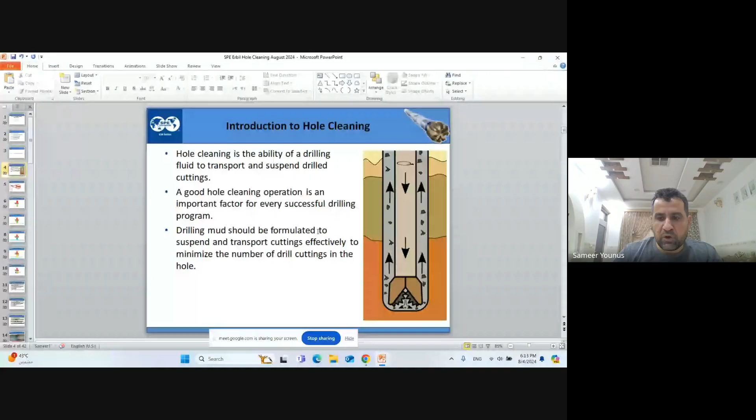Sorry for interrupting you, please share the entire screen. I am already sharing the entire screen. Once I said that, you told me you can't see the whole screen, but this is the entire screen. When I was moving the slides you were not following me. Do you see my slide? Yes, it's from the introduction.

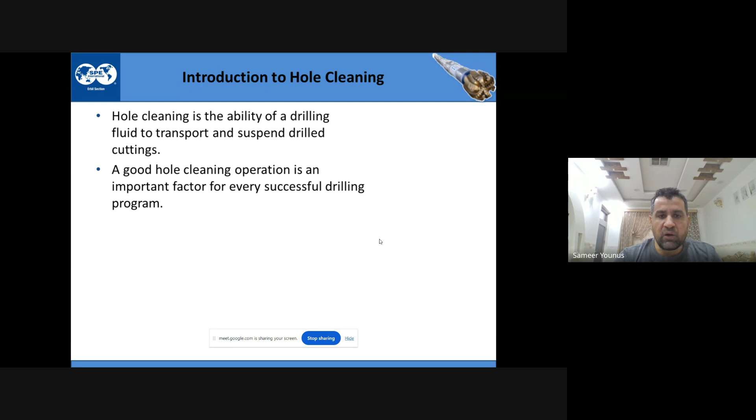So as we said, one of the major functions of drilling fluid is to clean the hole from the cuttings which we generate while drilling. Without cleaning the hole, we cannot go ahead and drill because the string gets stuck. A good hole cleaning operation is an important factor for the success of every drilling program, and drilling mud should be formulated in a way that it suspends and transports cuttings to the surface effectively and makes the hole clean.

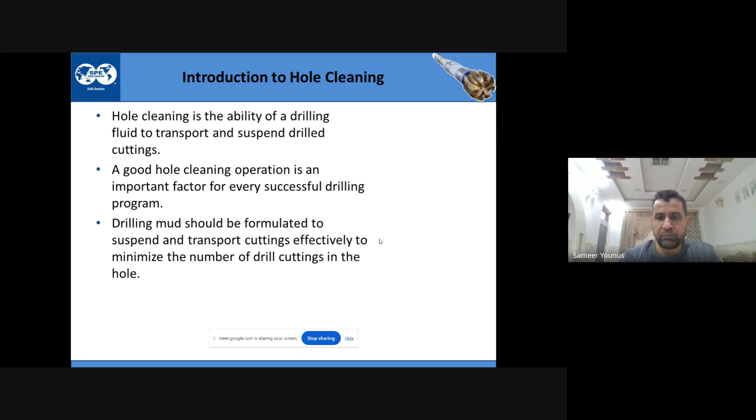So this is the principle. Let's go to one of the wells, our hole. When we drill vertically, there are forces acting downward and forces acting upward. To clean the hole, I will explain one by one how we overcome the forces acting downward.

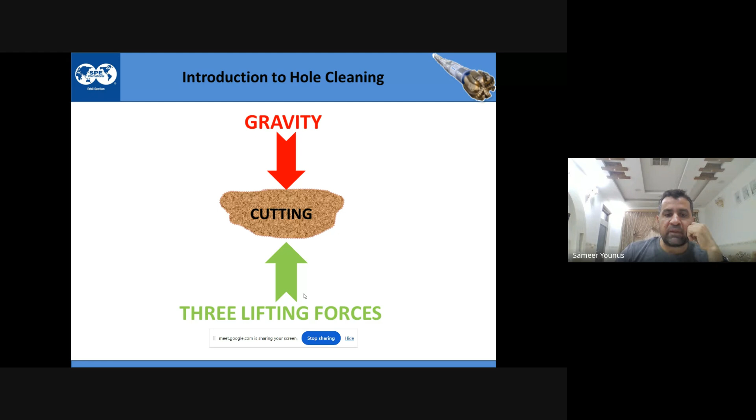First, the lifting force works against the gravity of the cuttings. The cuttings tend to go down, but we need to lift them. What forces help us lift these cuttings to the surface, to the shale shaker, clean the mud, and pump it again into the well? I'll explain one by one.

First is the buoyancy force. The drilling fluid has buoyancy. The higher the density of the drilling fluid, in specific gravity or ppg, the higher the buoyancy force. This is one of the forces that works cuttings out of the hole.

Second is the annular velocity, which works against slip velocity. The slip velocity means the cuttings tend to come down, but if the annular velocity is fast, it pushes the cuttings out of the well and does not allow them to settle while drilling. This gives a better chance for hole cleaning, so the higher the annular velocity, the better the hole cleaning.

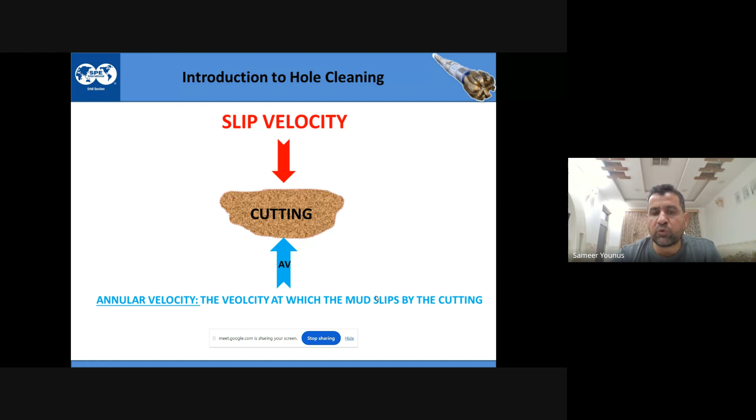But remember, very high annular velocity for hole cleaning will lead to erosion of the wellbore and washouts, and many other problems which we'll discuss later. I'm trying to keep this very basic for now.

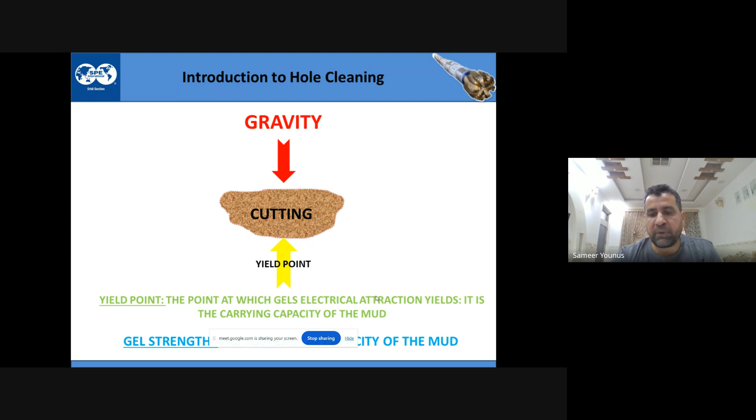Another factor is the yield point of the mud, which is the electrical force of attraction between mud particles. This is the carrying capacity of the drilling fluid. The yield point pushes the cuttings up, and gel strength also helps support this. But gravity tries to settle the cuttings.

So the lifting forces - annular velocity, buoyancy, and yield point - push the cuttings up, while gravity pushes the cuttings down. When we overcome the force of gravity and cutting slip velocity, we can clean the hole effectively. Is that clear?

Kak Herman, do you guys hear me? Yes Kak Sameer, it's clear. Thank you. Okay.

We need to monitor hole cleaning throughout the operation at all times. By observing torque and drag trend lines while drilling, we can determine if the hole is clean or not - through string movement, pickup weight, slack-off weight, and rotary weight. If we have high torque, hole cleaning is probably not good, and if the string weight shows too much drag, the hole is probably not clean. We also monitor the quantity, size, and shape of the cuttings.

The shale shaker is one of the best places to monitor if we have good hole cleaning. For example, if you're drilling at 20 meters per hour ROP, but only a small amount of cuttings comes back on the shakers, you know there is a hole cleaning problem. At that point you'll see torque and drag and pressure go up, along with many other problems. The shaker is a good place to observe this.

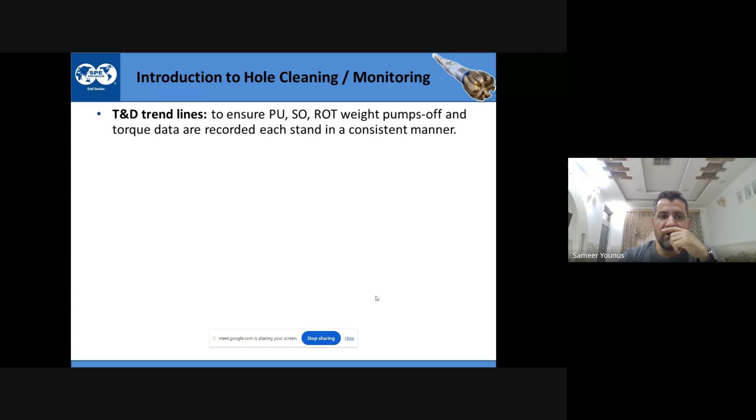In our case, it's about hole cleaning - when the ECD becomes very high, we know there's a probability the hole is not clean. In this case, we have to circulate until the hole is clean and make sure all cuttings are circulated out of the well. So we monitor torque and drag, the size and shape of cuttings, the amount of cuttings on the shakers, and downhole pressure while drilling, which also tells us the ECD.

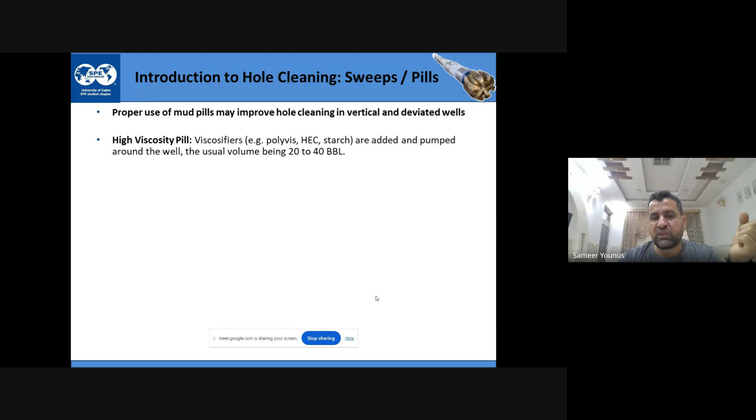If we use pills or sweeps, it improves hole cleaning. On the rig side, we use a lot of material to viscosify the drilling fluid and increase the viscosity so that we can carry the cuttings and bring them to the surface. We have high viscosity pills, low viscosity pills, weighted pills, and tandem pills.

Many times these tandem pills are used in highly deviated wells. You pump a light fluid, then low viscosity, then a high viscosity pill behind that. This will first wash the cuttings and agitate them, making the flow more turbulent, and then the high viscosity pill will pick up the cuttings and bring them to the surface. So these are the pills and sweeps we are using.

Many times while drilling a couple of stands, we pump a high vis sweep to sweep the hole and clean it. It's a very useful technique to clean the hole, especially in highly deviated wells. We use them a lot.

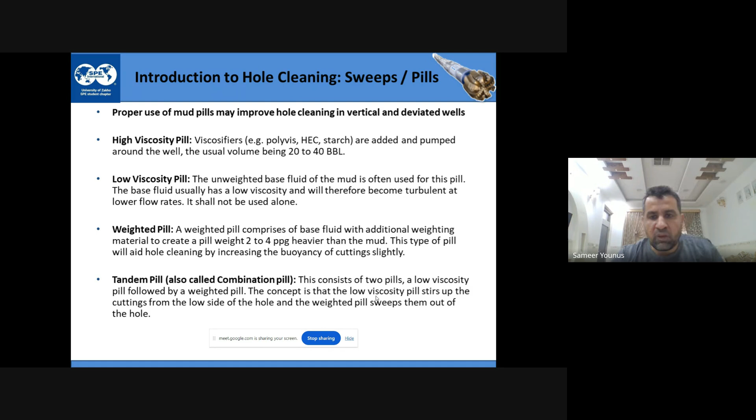There are some factors affecting hole cleaning. What are these factors, and what is their impact on drilling operations? We will go through them one by one. There are so many factors and players in hole cleaning.

Hole size: if it's a big hole size, what happens? It will result in a smaller annular velocity. This means the smaller the hole size, the higher the annular velocity, and the better the hole cleaning.

Washout happens many times in the wellbore. After you run the caliper log, you find there are some places in the wellbore where you've circulated for a long time, or it's by default a very soft formation, so it gets washed out. In these washout places, the annular velocity drops, and the carrying capacity, the hole cleaning capacity, will also drop.

Drill pipe diameter: the bigger the drill pipe, the better for hole cleaning, because it gives you higher annular velocity with smaller annular clearance. GPM, the gallons per minute: the more flow rate, the better the hole cleaning and the better the annular velocity.

Rotary speed: for a vertical hole it's not a big issue, but for deviated wells it's a big issue. Once you're drilling in rotary mode, it's already rotating by default. But sometimes in directional wells you have to do a lot of sliding, and once you do a lot of sliding, you're probably not cleaning the hole very well. So it's good to do rotary drilling and rotation sometimes, because rotation will agitate the cuttings and help push them out to the surface.

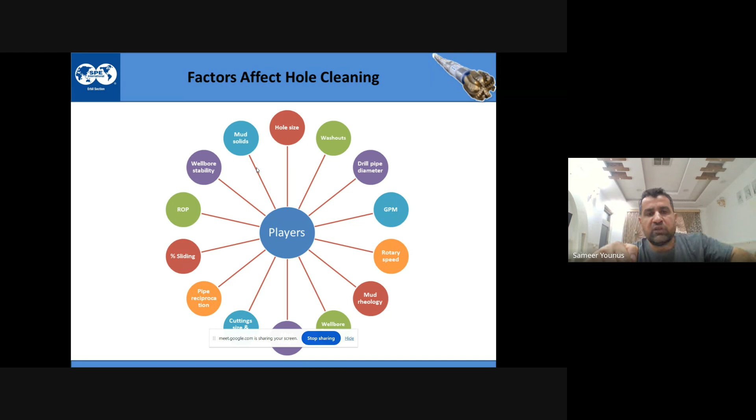But if the wellbore is washing out, it's getting bigger. When the wellbore gets bigger, your annular velocity drops. When annular velocity drops, your hole cleaning will not be very effective. Mud solids - once you are drilling, there will be a lot of mud solids in the wellbore, okay. So too much mud solids in the wellbore leads to washouts, okay.

That's why you have to run solids control equipment to remove the solids. Otherwise you will have washout. Mud solids will increase the PV, plastic viscosity - that's a good sign for hole cleaning. But very high PV means too much solids in the mud, and you will have problems again. So it's all interrelated parameters, okay.

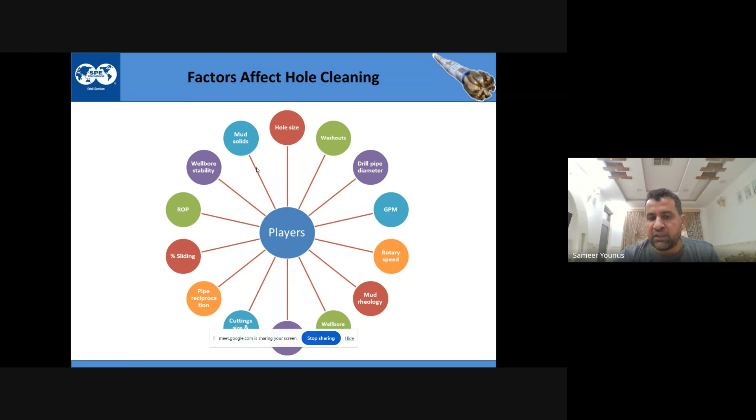What are the drilling problems related to poor hole cleaning? So once you are not cleaning the hole, obviously you will face problems. You cannot drill ahead, but before not being able to drill ahead, you face problems. What are these problems? We will go one by one.

So what are the symptoms? How do you know the hole is not clean? If you go to the shaker - you are drilling with 10 meter per hour ROP, you know how many barrels of cutting you are making. Of course the cuttings which come to the shakers should be more than what you are actually drilling, because the cuttings will swell and become bigger in size many times if you don't have good inhibition of the drilling fluid. So even if you have the same amount of cutting, you will know by default how the hole cleaning is.

That's why all the time somebody is going to stay on the shakers. A good drilling supervisor and a good drilling fluid engineer always check the shaker, how much cutting is coming out of the well. If you are drilling with high ROP and a small amount of cutting is coming, it means that you have a problem.

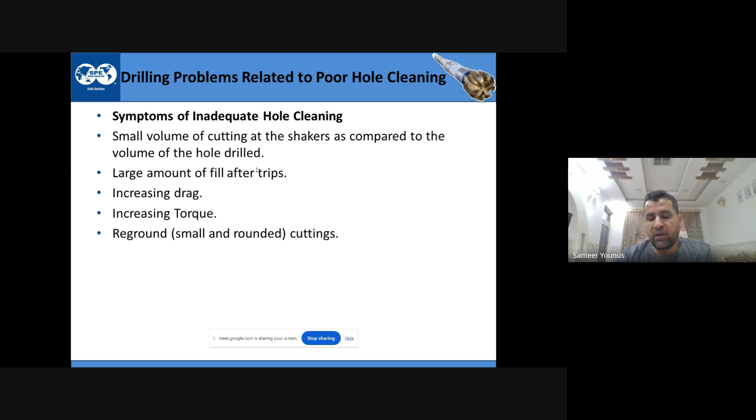Of course, we discuss drag, torque and drag, it will increase. And I said reground cuttings, because the cutting will be reworked. You are breaking the rock by the bit, you cannot clean it very well, it will remain under the bit for a long time. You will be reworking on the same cuttings for a very long time. It will damage the bit, prematurely dull the bit, and cause problems for casing setting depths. Because many times we have seen poor hole cleaning. You run the casing, and you see 3-4 meters of cuttings on the bottom.

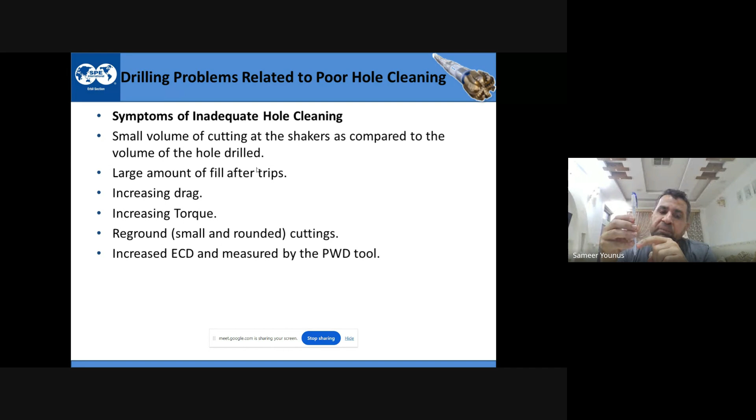That's a problem. It means your casing will never be on bottom where you planned. Poor hole cleaning can be seen by ECD, okay? If you have PWD in the BHA, pressure while drilling, it will tell you the pressure close to the bit here. What's the pressure downhole? Normally if ECD while drilling gives you 12.2, but if ECD is 13 ppg, that's high. So you need to know that the hole is not clean, okay?

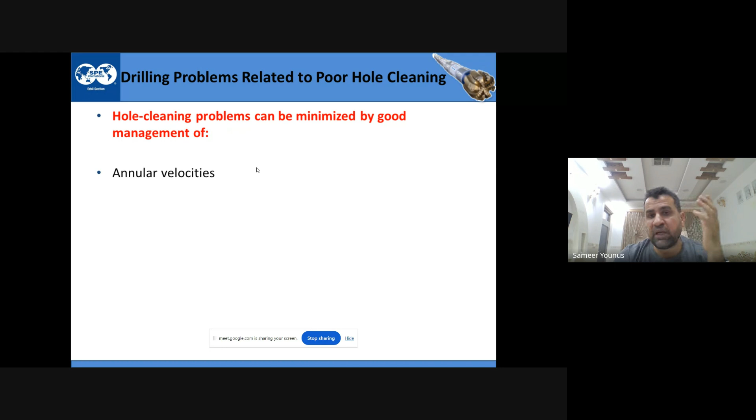The problems can be minimized by good management of annular velocity, drilling fluid viscosity, pipe rotation, and pipe eccentricity. Pipe eccentricity and pipe rotation speed mostly apply in highly deviated wells, okay? The last 2 points apply more to highly deviated wells.

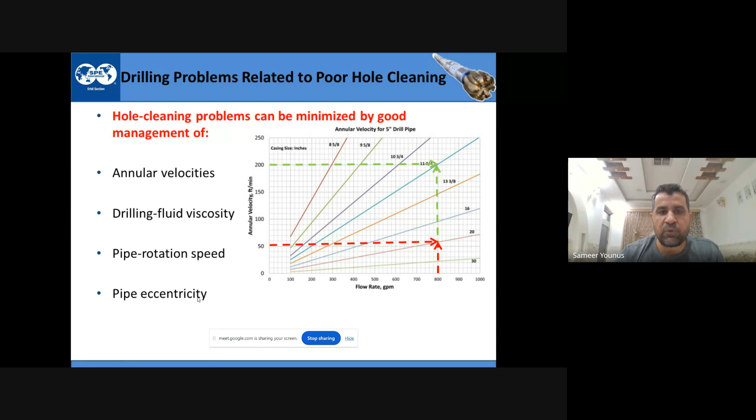So if you cannot remove the cuttings, so many problems will happen. What are these problems? Some of them we already talked about. We said you will have high torque and drag on the drill string. So if you have high torque, what does it mean? It means that you are getting close to the makeup torque of the drill pipe, let's say. So if your drill pipe torque rating is 25,000 foot-pounds, drilling torque more than that is impossible.

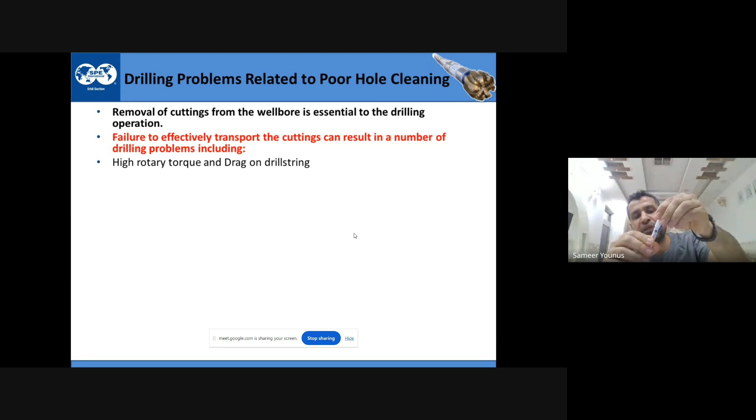So torque and drag means you get stuck, okay? Of course, that's a big problem. Hole pack off is another problem, with torque and drag increasing further.

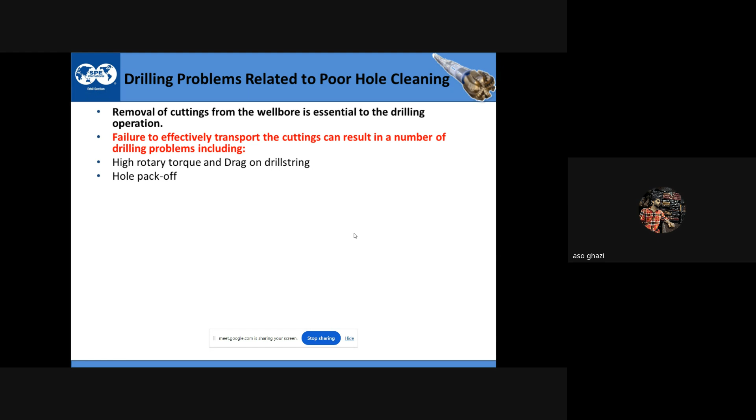With too much cuttings in the hole, you might get packed off. What's packed off? That's when the wellbore is closed around the drill string. You cannot circulate, and sometimes you cannot even rotate, but the biggest problem is circulation. Once you don't have circulation, the hole is packed off, and that's a stuck pipe issue.

Formation breakdown: if you have too much cuttings in the wellbore, the ECD might increase very high, close to the fracture gradient of the formation. When designing a well, you have fracture gradient and pore pressure lines, and you design your drilling fluid between them, higher than pore pressure, lower than fracture pressure. If ECD goes too high, you might break the formation, which is a big problem, and this means you will have losses.

In case of total losses, you will get underbalanced. Once you get into underbalance, you might get a kick, and you will get into a well control situation. So poor hole cleaning might lead you to a well control situation.

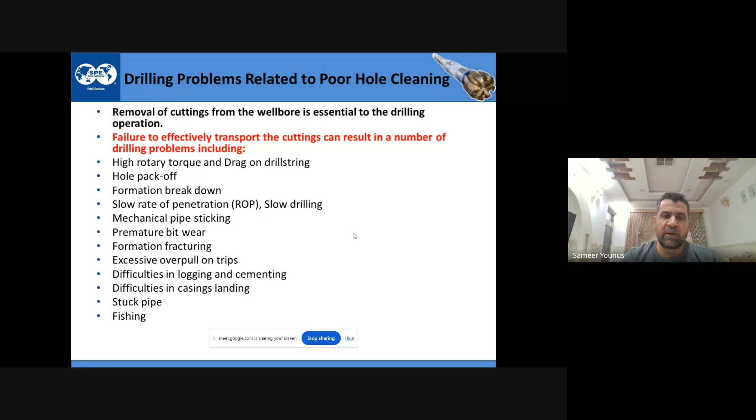Once you get to stuck pipe and fishing, this is out of scope of the drilling program, meaning you are doing NPT, non-productive time. Once NPT is too much, the upper management, the drilling manager, the drilling superintendent, everybody is unhappy, the company is unhappy. You are spending a lot of money and losing a lot of time, because stuck pipe and fishing needs a lot of money and time, and you might not even be able to fish the drill string out.

You might cut the pipe and cement the pipe in place, put another cement on top, do a sidetrack, drill another hole, and this might cost you a couple million dollars. So it's all NPT. Hole cleaning is a very, very important topic. If you are a drilling supervisor, drilling engineer, senior drilling engineer, or drilling superintendent, you have to make sure the hole is getting cleaned while drilling. Otherwise, all these problems will come one by one, and you face a lot of problems. So efficient drilling is good for drilling the well on time and on budget.

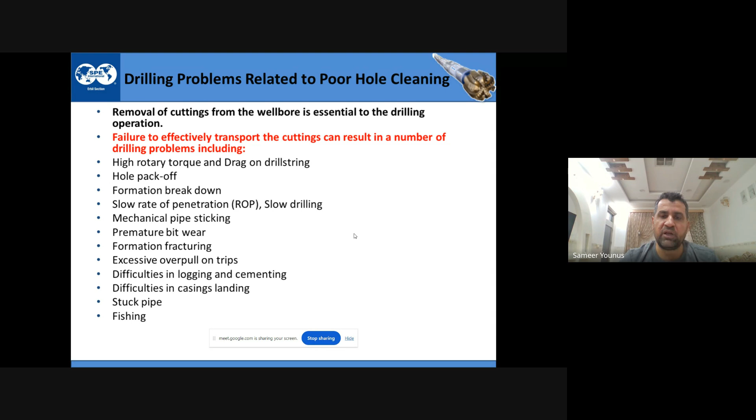Hole cleaning in the well planning stage - this is a very important point. Anything you do while well planning is better than doing it on location. For example, flow rates - you have to design flow rate and mud rheology prior to drilling the well, because that's part of well planning. But after that, on location, it's not part of well planning. Once you do adjustments there, you are wasting time and wasting money. So it's better to do everything in the planning stage, like flow rate.

For each section, what will be your flow rate? So in the well planning stage, once you design hole angle, hole size, hydraulics, bit hydraulics, mud pumps, slide drilling, BHA, casing program, planning tools - what are the planning tools? And hole cleaning charts, stuck pipe guidelines.

All deviated wells require high annular velocities. Deviated wells of course require high annular velocity because we said it's very difficult to clean the hole, and you should plan large diameter holes to be set to vertical.

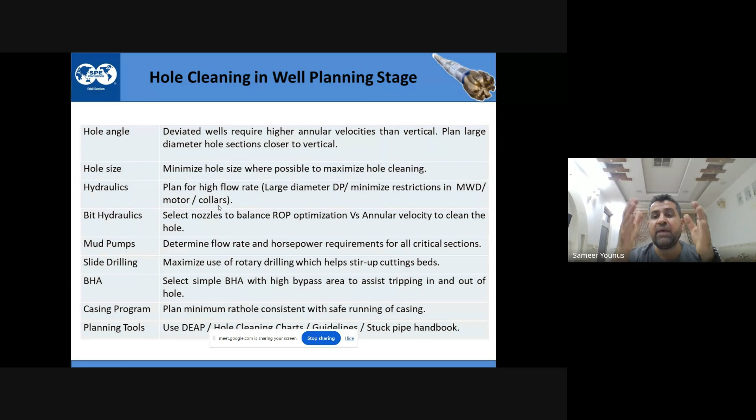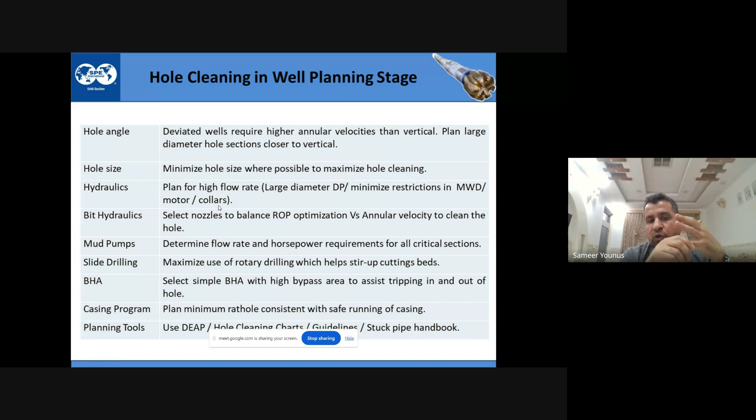Hydraulics - for flow rates, you have to design flow rates and use a large diameter drill pipe. For example, you can use 5-7/8 drill pipe, 5.5-inch drill pipe, or 5-inch drill pipe, and you have to have a good MWD with minimum restrictions in motors, and drill collars should have bigger IDs. Many times a flow kit in the MWD and motor will restrict you with the flow rate. So that's a problem. You have to plan hydraulics to give you a better flow rate for top hole and higher pressures for down holes, and hydraulics like nozzle size and number of nozzles, planning annular velocity, planning ROP, all these jet impact forces, jet nozzle velocity, and hydraulic horsepower.

There are softwares, hydraulic Excel sheets that assist in bit hydraulic design and selections, because a big part of hole cleaning is related to hydraulic optimization. Mud pumps should be able to give you the horsepower and flow rate you want. The liner sizes - the bigger the liner size for the hole section on top, the bigger the flow rate, but it gives you less pressure. For deeper sections, you need smaller liner sizes with higher pressure capabilities.

Slide drilling - as we said earlier, sliding is a big problem for hole cleaning. The more you slide, the less you are cleaning the hole in deeper sections. So it's better to slide a little bit and then switch to rotary mode - sliding and rotary, sliding and rotary. In vertical sections, you are always doing rotary drilling. But in highly deviated wells, extended reach wells, J-shaped wells, you have to build angle, no more vertical - you have to make angle. To make the angle, you need a motor or RSS. To build the angle with a motor, you need sliding drilling. Slide drilling means the string is not rotating - only the bit is rotating.

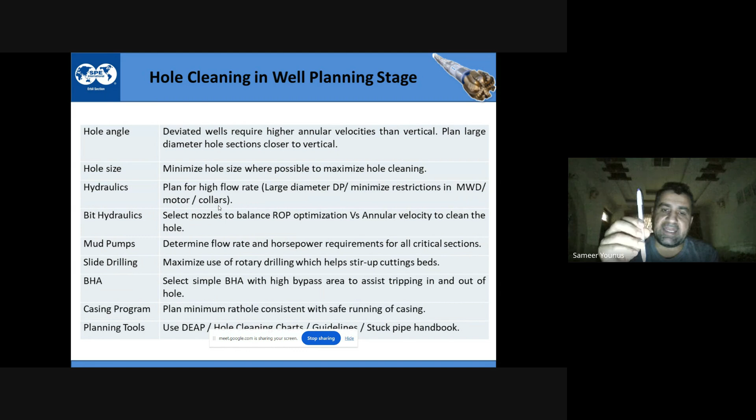Rat holes - while casing, you have to plan rat holes minimum, okay? If you have 4,000 meters of hole, try to make sure your rat hole is very little, like half a meter or 1 meter maximum. Why? Because below the casing shoe, you will be drilling another size of hole. Let's say you drilled 12 1/4, you run 9 5/8 casing, but after that you drill an 8.5-inch hole. Below the casing you have still a hole, a rat hole, which is 12 1/4, and this is full of cement. When you start the smaller hole, a lot of big chunks of cement will fall down into the wellbore. It might lead to a stuck pipe, it might lead to hole problems.

So hole cleaning tools such as charts, softwares, guidelines, stuck pipe handbook, landmark softwares, flow and hydraulic optimization tools - they are all there, like drilling engineering applications, a lot of them available. So you can use them for improving hole cleaning during the planning stage.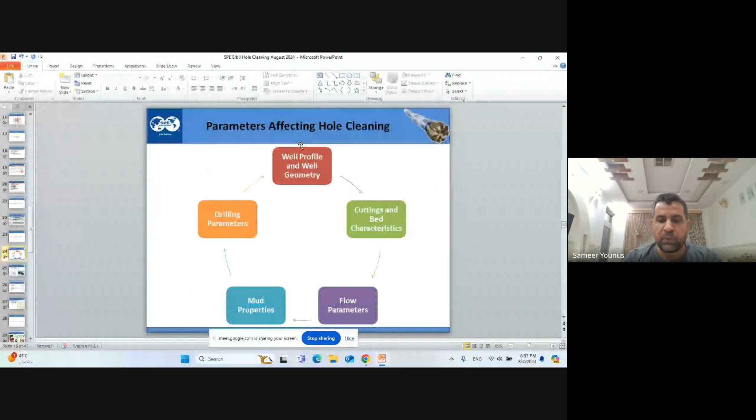Flow parameters and mud properties. Flow parameters like GPM - what kind of GPM, gallon per minute, are you pumping? Flow rate - for example, in the surface hole, it's a big hole, you need high flow rate to have maximum annular velocity to help the cuttings be lifted to the surface. For smaller sections, you have less GPM. For example, for a 26-inch hole, the higher the better - let's say 1,400, 1,500 if you can, if the rig pump and rig pressure allow you to pump this much, it's good. But for a 6-inch hole, if you pump 400, it's perfect. If you pump 300, no problem. I've drilled with 250 GPM in a 6-inch hole.

250 GPM, good hole cleaning, no problem. Because the clearance between 6-inch hole and 4-inch drill pipe is very little, so the annular velocity will be very high. The cuttings will be cleaned.

Mud properties: mud weight, yield point, viscosity, and gel strengths. All these mud properties we call rheology. So improving rheology will help you effectively clean the hole.

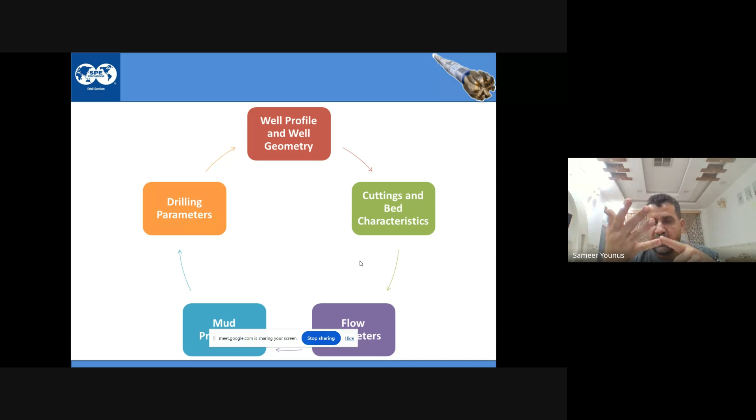Drilling parameters. What are the drilling parameters? Weight on bit, RPM, and mainly ROP. All these things are interrelated with torque and drag, and they all have a great role in hole cleaning.

Casing, hole, and drill pipe diameter: the smaller the clearance, which we call annular clearance, the better for hole cleaning. Why? Because the annular velocity is very high.

The Reynolds number, which you study in engineering hydraulics, tells you whether the flow regime is laminar, transition, or turbulent. It has a scale: 0 to 2100, 2100 to 4000, and higher than 4000 to tell you whether the flow is laminar, transition, or turbulent. So the higher the flow rate, the higher the annular velocity, the more turbulent the flow, leading to better hole cleaning because the cuttings will be turbulated, but you might have washout across soft formations.

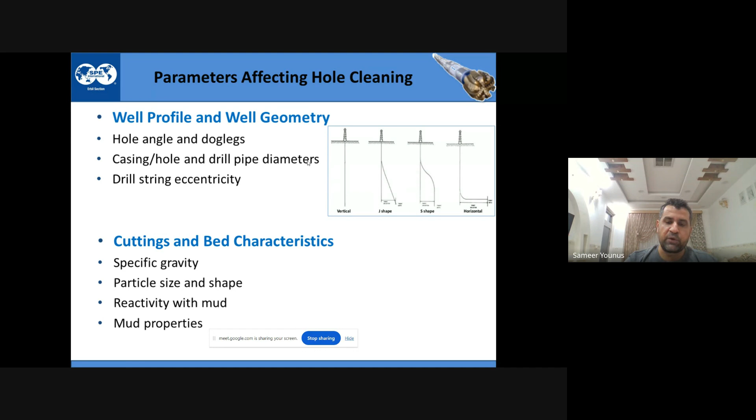Cutting beds and characteristics: specific gravity of cuttings, particle size, shape, reactivity with mud properties. All these parameters are interrelated between the cuttings and mud properties, and they help clean the wellbore better. For example, this piece of rock cutting has a specific shape which will be cleaned inside the well easier than the same shape if it's rounded.

The cuttings with higher specific gravity will be more difficult to lift to the top by the carrying capacity of the fluid and by buoyancy. So the specific gravity is working against you. Particle size and shape are all interrelated parameters.

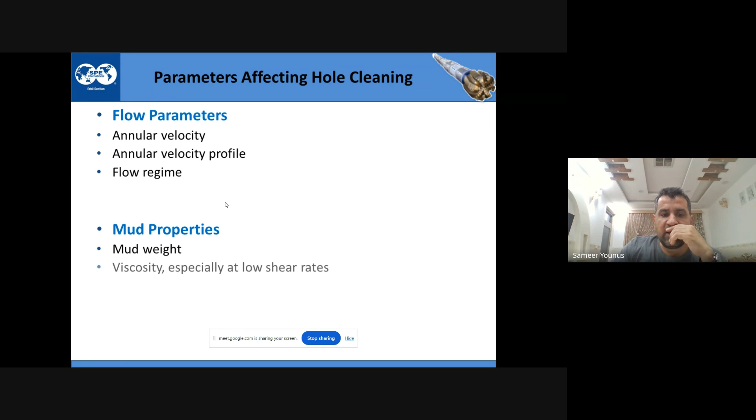Flow rate: we said it will increase annular velocity. Annular velocity profile: whether it's laminar, turbulent, or transition regime, it will have different profiles.

Mud properties: mud weight. Rule of thumb, never increase mud weight for hole cleaning purposes, because increasing mud weight has a specific window. We said it's between fracture gradient and pore pressure, the mud weight stays within this window. You can increase flow rate, but not mud weight, because mud weight is part of the well design, part of the casing design, wellbore pressures, and hydraulics.

It has a big impact on the ECDs, because once you have higher mud weight, you have higher ECDs. It might clean the wellbore, but it might lead to losses. Once you create losses in the wellbore, you are having bigger problems and bigger NPTs. You might have, as we said earlier, a well control situation due to high ECD, fracturing the formation, breaking it down, and starting losses.

Viscosity, especially low shear rates such as 6 RPM, has a range between 1 to 2. Gel strength, it's good.

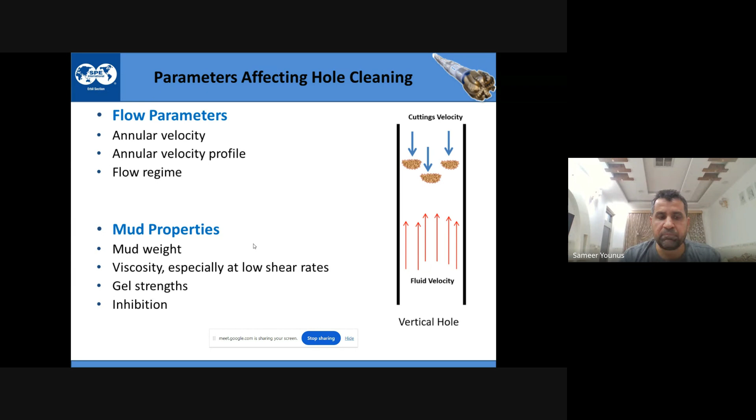Inhibition: what is inhibition? For example, if the mud is well inhibited, why do we use inhibition, let's say for shale, so that the mud does not react with the formation. This is good for the formation, but for the cuttings, it's good if the cuttings are inhibited so they mix with the drilling fluid, get dispersed in it, and don't cling to the surface. But inhibition as a word is good for shale inhibition; for the cuttings, it's a different story.

Drilling parameters: bit type, ROP, differential pressure.

What is this differential pressure? It's the pressure which we are applying to the formation by circulation, by ECD, and the formation pressure. The higher the differential pressure, the less capability of hole cleaning.

That's why underbalanced drilling is better for hole cleaning, because of the cutting hold down effect. They call it cutting hold down effect because once you break the rock, this cutting formation holds down to it. If you apply too much pressure, it will stay there. But with less differential pressure, such as in underbalanced drilling, the cutting will chip away faster and be cleaned faster. It means the formation pressure assisted you to clean the wellbore.

I said underbalanced drilling. Normally there are three techniques for drilling. One of them is overbalanced drilling, where your mud weight is higher than the formation pressure. I mean your wellbore pressure or dynamic pressure is higher than the formation pressure - that's overbalanced drilling. Once your hydrodynamic pressure, which is your hydrostatic of the mud plus your ECD, is less than the formation pressure, this is underbalanced drilling.

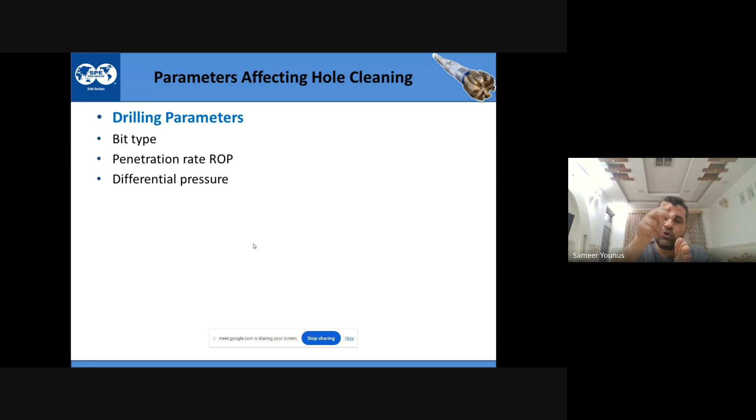Another third one is MPD, managed pressure drilling. It's all about your fracture gradient and your pore pressure. Once your mud weight is very close to fracture gradient, much higher than your pore pressure, it's overbalanced. When your mud weight is below the pore pressure, it's underbalanced. Once you stay always close in the narrow window between them and try to drill between them, we call this managed pressure drilling. It's very close to underbalanced drilling, but we are not going underbalanced.

Pipe rotation, we said, is very important for hole cleaning, especially in highly deviated wells. And I think we are getting very close to finishing our first session.

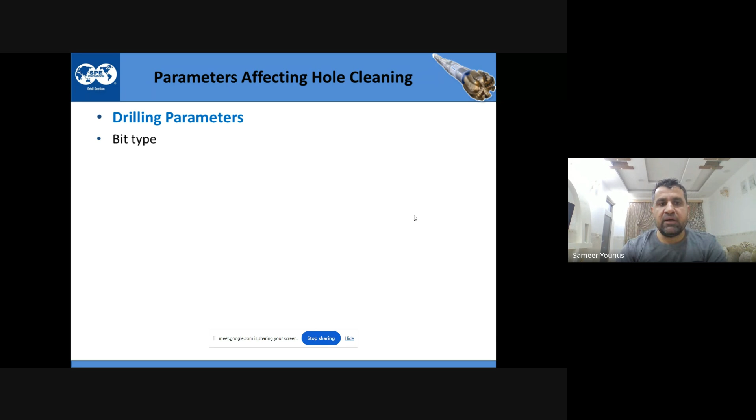We said drilling parameters such as bit type, penetration rate, differential pressure, pipe rotation, and eccentricity will affect hole cleaning.

We said bit type. Why does bit type affect hole cleaning? For example, if the bit is very aggressive, it will have a very high ROP, such as a PDC bit with big cutter sizes. Once the bit has big cutter sizes, it will go into the formation rock more. It will generate more cuttings, sometimes bigger cuttings, sometimes more cuttings. So it depends what type of bit.

Penetration rate: the higher the ROP, the more cuttings in the wellbore, and you need to clean them. Differential pressure, we talked about it, pipe rotation, and also pipe eccentricity. We talked about all of them.

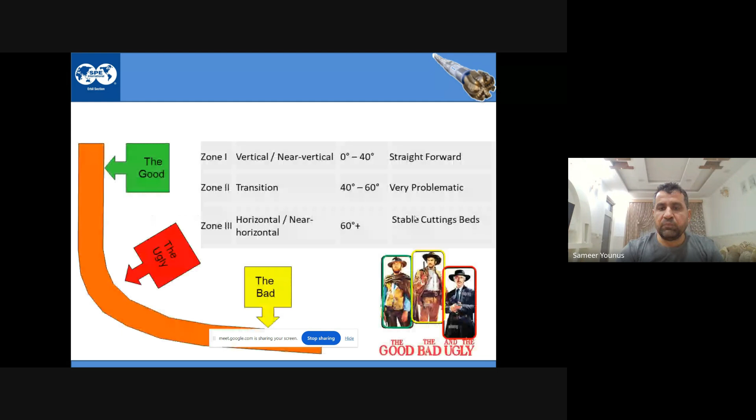Hole cleaning and well trajectory. There is a very big relation between hole cleaning and well trajectory. I talked about the hole being vertical, deviated, or horizontal. So let's go into this topic more and see how this wellbore trajectory affects hole cleaning. What are the zones?

I put this here so you don't forget. This is like the movie, The Good, the Bad, the Ugly. We have the good, the bad, the ugly. So there are 3 zones.

The good one is a vertical wellbore or near vertical wellbore. Sometimes the angle is even 10 degrees, it's not a problem. Close to vertical, 10 degrees or 5 or 6 degrees is no problem. It's easy to clean with rotation, or without rotation, it's no problem.

Zone 2 is the transition zone. This one is the ugly zone. It's the problem zone. Why?

Because the cutting here, where you see the mouse, I'd like to make some drawings on the screen. Looks like I'm not able to do that. Yeah, I don't know why. Normally I should be able to, but it's not a problem.

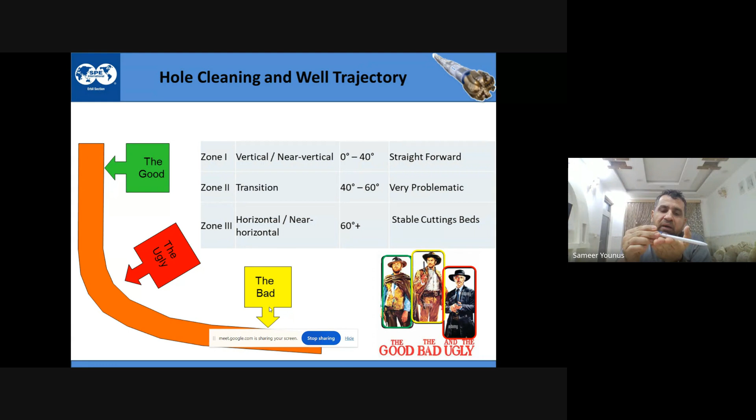If you are sliding, it means you are drilling like this, and the cutting bed will be there all the time. But if you are rotating, you're drilling like this, so you agitate the cuttings and it will clean the hole better.

So this is the relation between wellbore trajectory and hole cleaning. Vertical means good hole cleaning.

Transition zone, which we call zone 2, is between 40 to 60 degrees. It's a very big problem there. When you pull out the BHA, you drilled like this and go horizontal, like 5 kilometers, no problem.

But when you pull back to where you have this curve, the high curve, you bring with the stabilizers a lot of cuttings. You push them, pull them together with you, and you get stuck. You cannot move the stabilizer.

That's a big problem because there is avalanching there. They call it Boycott settling. Boycott is the name of the person, the scientist, who studied this phenomenon.

In horizontal, it's a stable cutting bed all the time. You have cuttings below the drill string. That's why you have to rotate and make a turbulent flow profile. We said there are regimes: laminar, transition, turbulent. For turbulent, it's good to make turbulent flow for high angle or deviated wells.

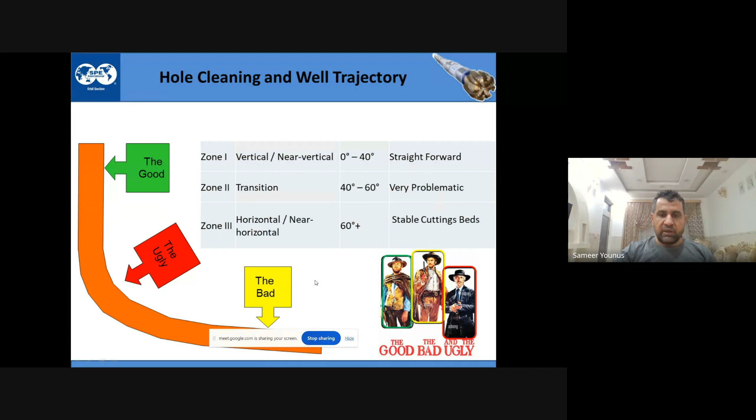Okay, let's play this little video.

Vertical hole certainly has its challenges. However, from a hole cleaning perspective, it is the easiest to clean. Normally, vertical hole cleaning is accomplished by plug flow of a drilling fluid that is designed to suspend the cuttings when the pumps are shut off. The cutting, in this case, has thousands of feet to fall before it reaches bottom.

You see, now the video was while drilling. You are drilling, and the cuttings are always going up, moving up the wellbore. If you turn off the pump to make a connection and add another stand to drill ahead, if this drilling fluid does not have good carrying capacity, good gel strength, good viscosity, good rheology, the cuttings will settle down.

Once it's settled down, you might get a whole pack of problems. That's why mud rheology has one of the biggest impacts on hole cleaning - very important factor. The rest is annular velocity. Between the wall of the hole and the drill pipe, you will have annular velocity, and the cuttings will move slow if this space is wide - very slow movement of cuttings, poor hole cleaning. If it's tight, very high speed of cutting movement, annular velocity, but it will lead to washout. Washout increases the hole size, we talked about that.

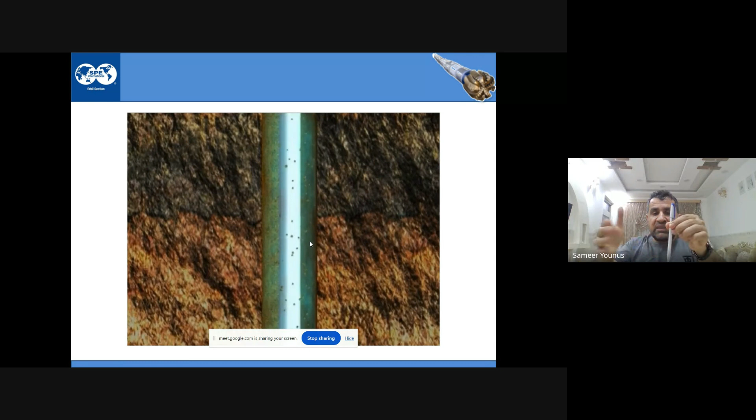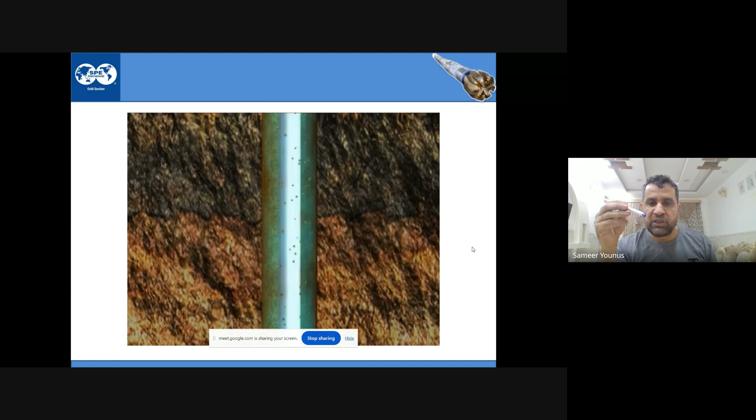Fluid rheology is generally the key factor for effective hole cleaning in this section. Improve your fluid rheology so that you can have good hole cleaning. Mud engineers deal with this - they always work on the fluid rheology, making sure our mud is in shape, fresh and good. They do pilot tests daily, twice or three times, and take all the readings for mud properties, rheological properties.

You see why there are small pieces of cutting there - because of regrinding, working on them all the time. So the drill bit gets dull. It affects dull grading of the bit, and it affects ROP, rate of penetration.

Once you have this case, you are very close to getting to a stuck point, because if you don't clean the wellbore and you have a lot of cuttings around the BHA, once you finish this stand and make a connection, you need to turn off the pump. Once you turn off the pump, all this cutting settles down around the bit. If this is high, it leads you to stuck and pack off.

If it's little, you can find out when you make your connection. Once you start the pump, you will have a pressure spike. Once you start rotary, you will have a torque spike. Once you see these two, you have to take action. You should know that there is a fill on bottom while making connection - this is a sign of poor hole cleaning. I hope it's clear.

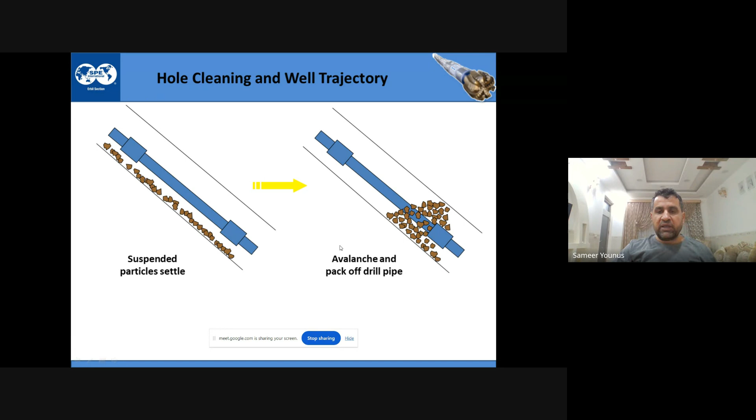In a vertical hole, we have fluid velocity, and we have cutting velocity down, which is called cutting slip velocity. The cutting wants to go down, the fluid velocity wants to go up - whichever one is higher, that one is the winner.

This is again completely horizontal - you are drilling this way. You see, that's the normal case, you are drilling this way. If you stop the pump and pull back the drill string, the pull back at the tool joints or the stabilizers brings all the cuttings with itself until it leads to a pack off. This one you can see on the rig floor and in the mudlogger screen by three things.

First, torque. Second, drag. Third, pressure. These three things have a trend - let me make three lines. I call this torque, this drag, this pressure. If you see this paper, I have torque, drag, PSI graphs. Normal operation, there's no problem. Now, if you see PSI goes up, torque goes up, drag goes up - problem.

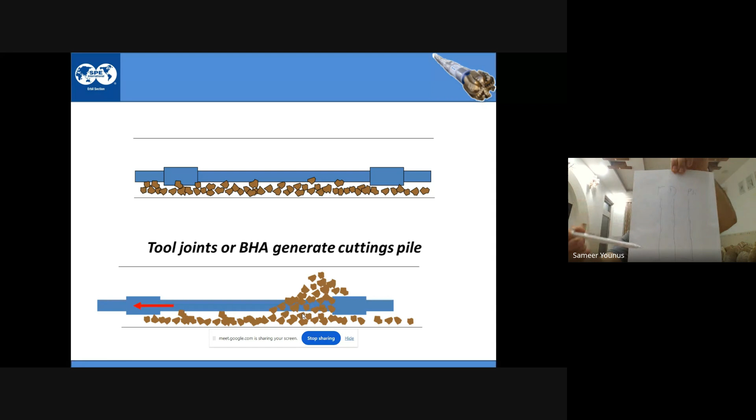Now I created a problem. My torque, my drag, my PSI, which is pumping pressure, whenever it goes away from the trend, if you can see this paper, it means I'm facing a problem. I have to take action. What am I going to do? I stop drilling. I have to make sure the wellbore is clean.

I will circulate, I will rotate, I will pump high viscosity sweeps, and I will reciprocate, move the string up and down. Once things go back to normal, I will no more have the problems. Everything goes back to normal. This means that I'm a good DSV. Otherwise, I'm not a good DSV, I'm not a good team player. I have to watch all these curves all the time, okay?

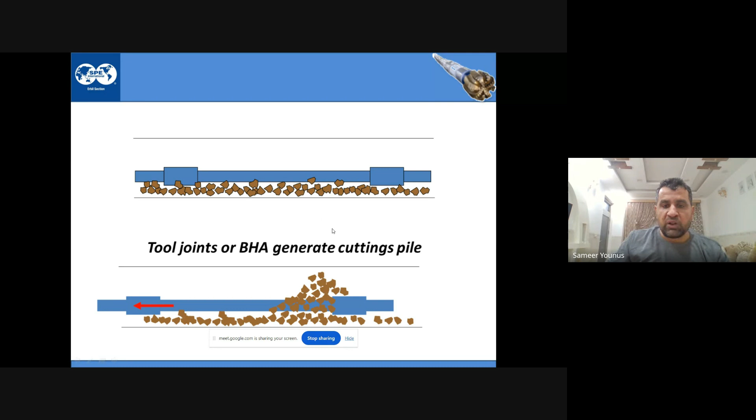So we said, without cleaning cuttings is a big problem. Let's play this little video.

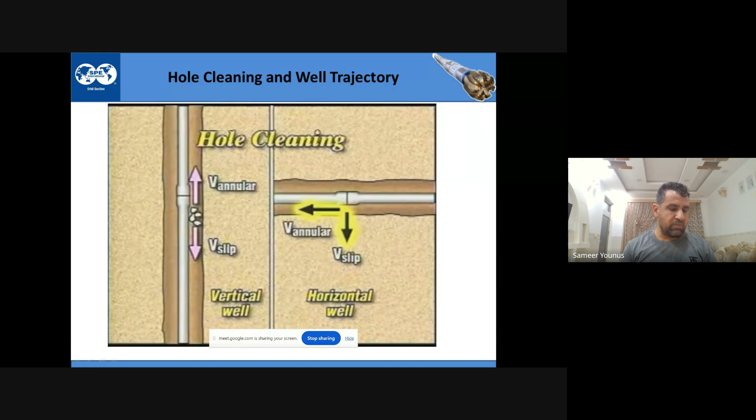In a vertical well, effective hole cleaning takes place when the mud's average annular velocity, which tends to move cuttings upward, exceeds the average slip velocity, which tends to drag them downward. By contrast, in a horizontal hole section, annular velocity acts perpendicular to the slip velocity, and so does not act to counteract particle slippage. The mud has to move cuttings along fast enough that they can't accumulate as they drop out of the flow stream and form a cuttings bed. The annular mud velocity for effectively cleaning a highly deviated well is generally higher than that required for a vertical well.

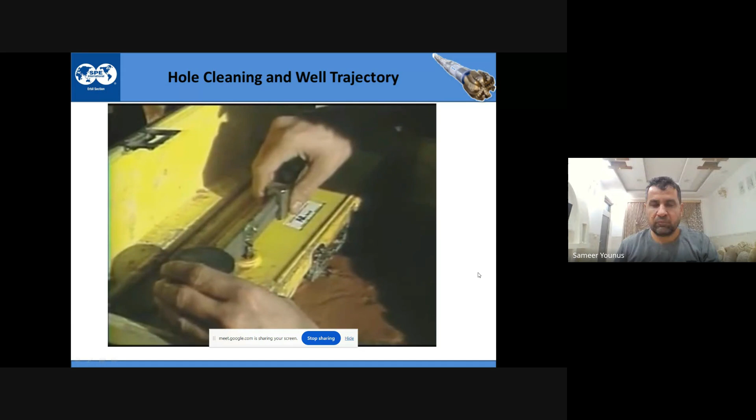Hole instability is another potential problem, particularly in the build section of the hole. This requires careful attention to the mud weight and to the interactivity of the mud components with the minerals in the formation. Formation damage is an area of concern that's magnified in horizontal wells because they expose more of the formation than do vertical wells. Special attention to this aspect of drilling fluid design is, therefore, critical.

Okay, so this video was about hole cleaning and trajectory. Skin damage is not part of the issue, it's about the drilling techniques.

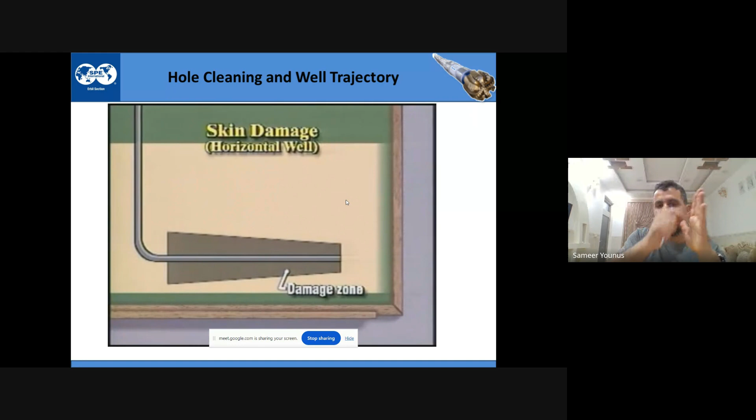We talked about drilling techniques, the three ones. The skin damage will be minimum when you are drilling with underbalanced drilling - it's out of our topic, just to let you know. But with overbalanced, you will have a lot of skin damage. Skin damage is where you have the wellbore here like a skin, you are damaging the permeability around the wellbore. Thus, you will reduce production rates and flow rates when you are making the well into production, and you will create more problems.

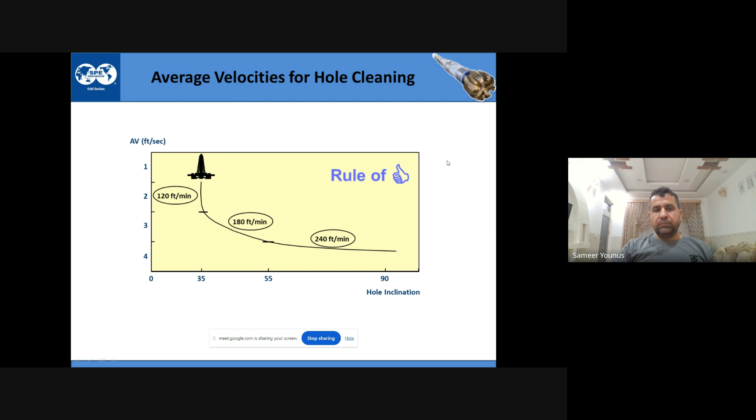When we drill the well trouble-free, this means that we are drilling within time and budget. Budget, it's AFE, Authority for Expenditure - how much you wanted to drill this, how many dollars you spent on this well.

We said for hole cleaning, it's not a good idea to increase mud weight, because increasing mud weight also leads you to another problem: increasing ECD.

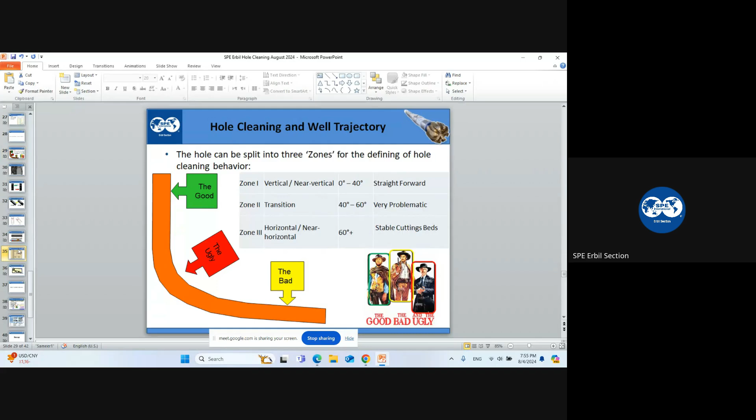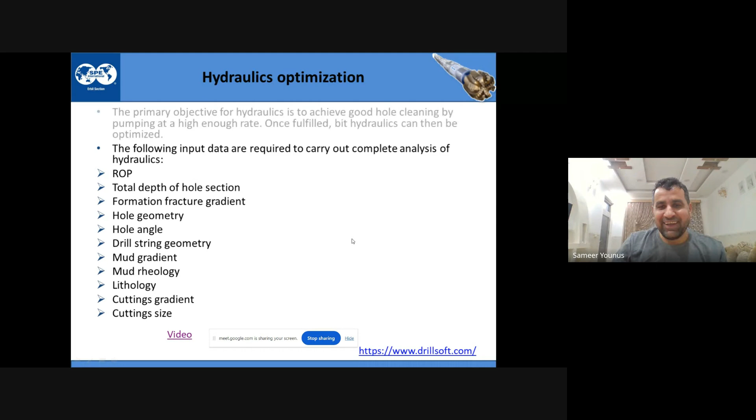Anyways, there was a video I was trying to show, it's not a big deal, I can put the video. It's about this software, DrillSoft company. It was a good example for hydraulic optimization, but looks like when I click here it's taking me somewhere else.

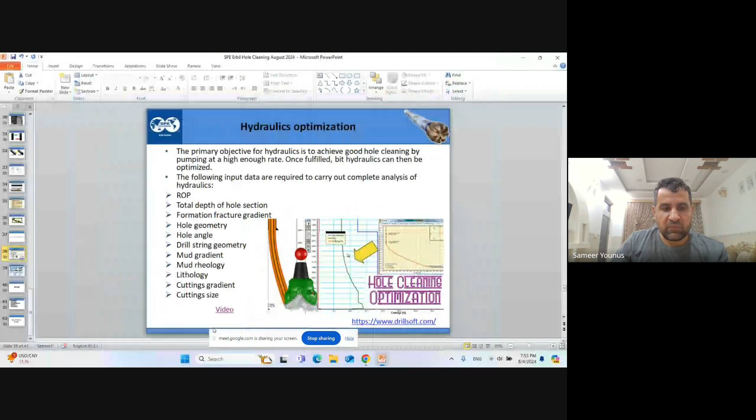Let's see if I can copy the hyperlink and come here... I cannot.

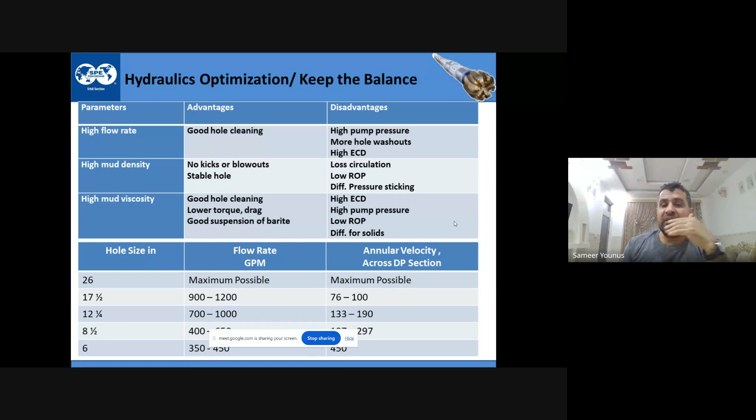High mud density's advantage is that it does not allow you to get kicks and blowouts, and gives you a stable wellbore. But it also leads to more ECD, loss circulation, lower ROP, and differential pressure sticking. So you have to make sure you use enough mud weight to be above the formation pressure and to clean the wellbore enough, and of course stay below the fracture gradient.

We call this the mud window. We said fracture gradient and pore pressure define your mud window in between.

Mud viscosity is good for hole cleaning. It gives you low torque, drag, and good suspension of barite, but higher viscosity leads to higher ECDs, which may cause erosion of the hole if there's too much solids in the mud. It can also give high pump pressure, lower ROP, and a lot of solids in the wellbore.

There's a rule of thumb I got from the ADCO drilling manual: each hole size has a recommended flow rate, and also a recommended annular velocity across the drill pipe section.

For a 26-inch hole, the more flow the better. We used to pump 1400 to 1500, but 1500 is very difficult because of the liner, rig capability, and pressure rating capability of the liner.

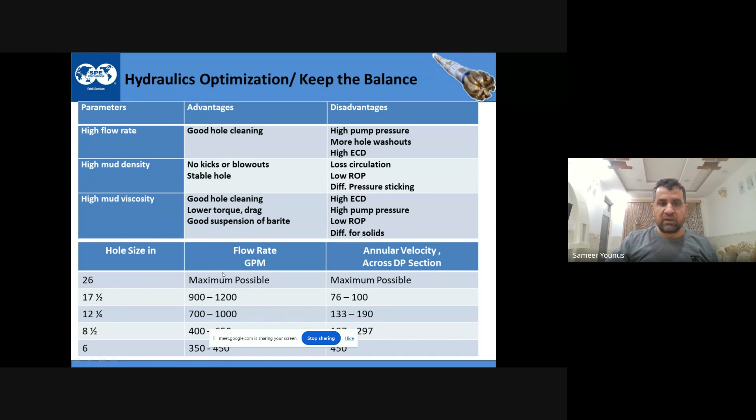Okay, I will recap everything in maybe 5 minutes or so, and then we will have a discussion.

So, hole cleaning and rotary speed: the more you rotate, the more you agitate cuttings, the better you clean the hole.

Flow rate: the faster you pump, the higher the annular velocities, the better you clean the wellbore. But your flow rate shouldn't be too high, or it will erode the soft formations and cause washouts, which have other problems.

For example, for casing running while cementing, a washout may be as big as my room. This is a big problem for cementing: you have to pump a lot of cement, and you won't know the washout is there unless you've run caliper logging. Then all the cement will end up there and the pipe will be free.

Another issue is that the annular velocity will be very slow in the washout area, so all the cuttings will fill there and you get stuck. Okay, now mud rheology.

Hole cleaning has a big relation with mud rheology. Improving rheology improves carrying capacity, like yield point, viscosity, gel strength, all these fluid properties. Even mud weight is very good for hole cleaning, but it's not considered that you go increase mud weight to clean the hole. First, you have to make sure you are not exceeding the ECD, which is passing the fracture gradient of the formation.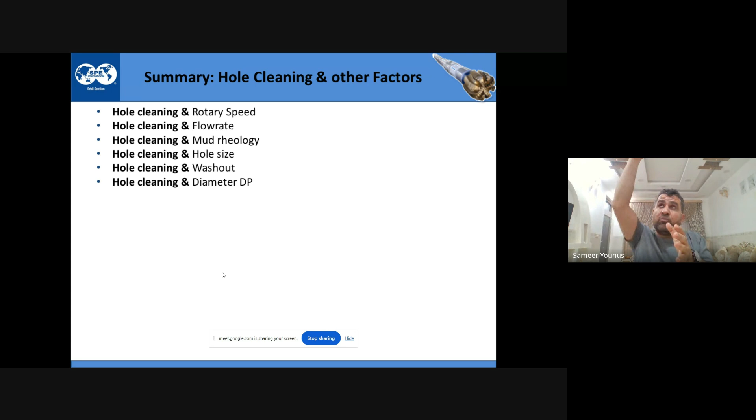Diameter of drill pipe: bigger drill pipe, smaller clearance, faster annular velocity, better hole cleaning. Smaller drill pipe, more clearance between drill pipe and the wall, means slower fluid movement, means less hole cleaning. Well trajectory or hole angle.

Vertical, perfect. Remember the bad, the good, the ugly. So the vertical is good, horizontal is the bad, the ugly is the inclined section between 40 to 60 degrees, like this one. Because the cutting here avalanches, the cutting slides down, all the cuttings are sliding down. So that's why when you build trajectories, you have to make sure you have a very smooth curve. Dog legs should be smooth and all these things.

Flow regime, turbulent or laminar. Laminar, we talked about Reynolds number. Reynolds is the scientist who did this flow regime test, and he did a good job. He said there are 3 zones: laminar, transition, and turbulent.

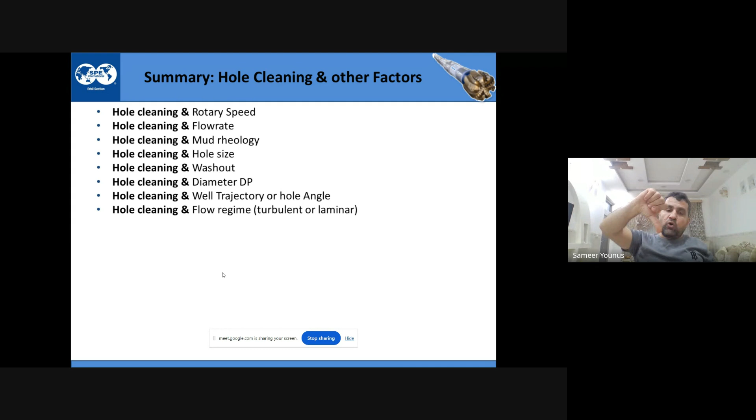Turbulent flow, laminar flow for hole cleaning. Turbulent flow for washout is not good. Turbulent flow for hole cleaning is good. So it's all interrelated. Turbulent flow starts at 4,000 and higher. Laminar flow is 0 to 2,100. 2,100 to 4,000 is the transition zone, which is also okay for hole cleaning.

Cutting sizes: big, small, density, specific gravity, all this affects hole cleaning. Mud weight, pipe reciprocation, moving pipe up and down, meanwhile rotation. Of course, moving pipe agitates the cuttings, moving pipe up is very good. Sliding, we said we drill directional wells by 2 methods, by rotary and by sliding. Sliding is bad. Sliding does not rotate the pipe. It makes a lot of problems.

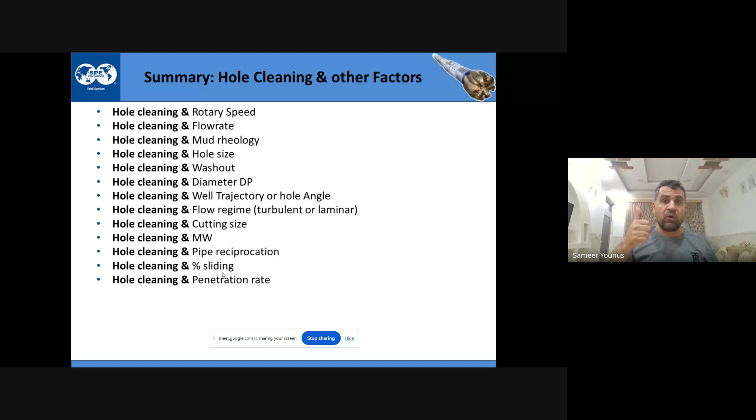Penetration rate, ROP. Always, I love ROP. ROP is very good, you drill 10, 15 meters per hour, even more, it's better. But you have to make sure you are cleaning the hole. You have to go to the shaker all the time. You have to check you have ROP 15 or 20 - is it the same amount of cutting coming out? You have to make sure about that.

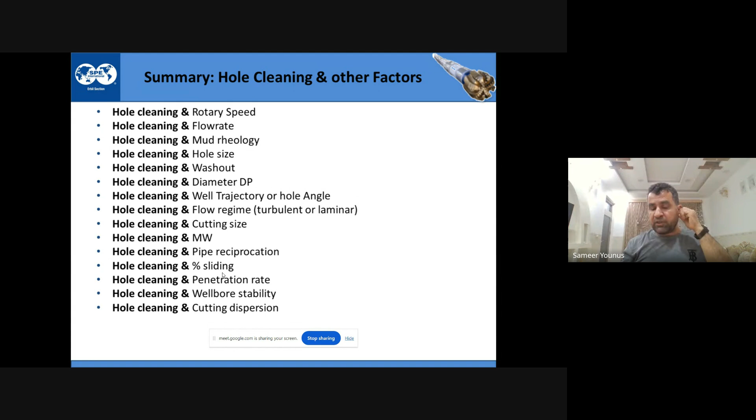The cuttings will be mixed with the drilling fluid, like for example in a formation where there is a lot of clays. This clay will be mixed with drilling fluid, it will even sometimes improve rheology, and it will clean the hole. But remember, when you need dispersion, there should not be inhibition in the drilling fluid system. For example, shale - we use shale inhibitors to make sure there is no swelling, no interaction and reaction between the cutting formation and the drilling fluid. So inhibition and dispersion are two different things.

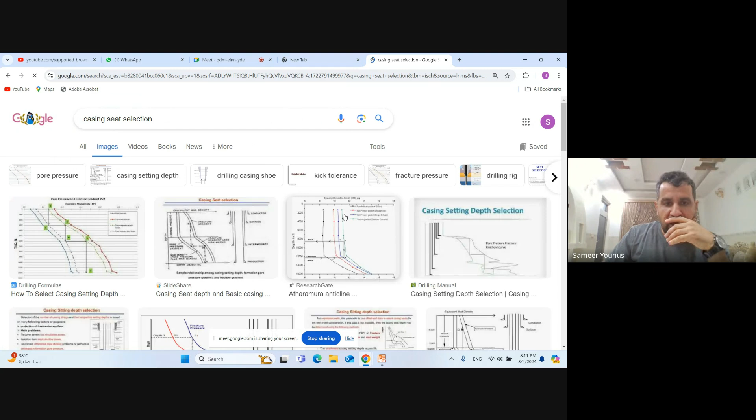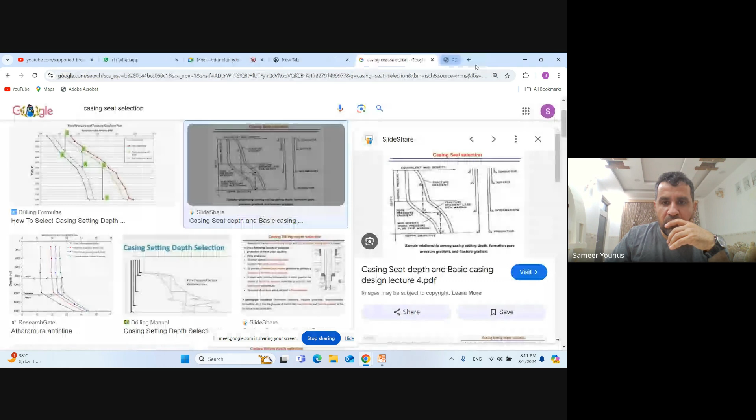Yeah, we see it. Okay, this is for the person - I'd like to explain more. I'd like to show you this picture. What was his question? You read the questions and I'll make sure. This is a very small picture, let me explain on a bigger one. Okay, can you see this picture clearly? Yes, Mr. Sameer.

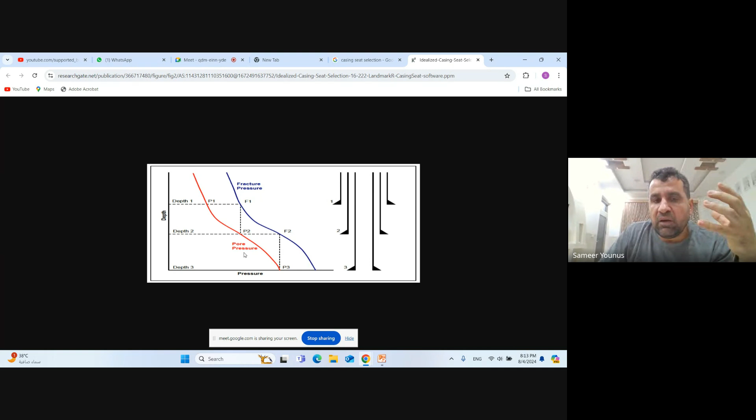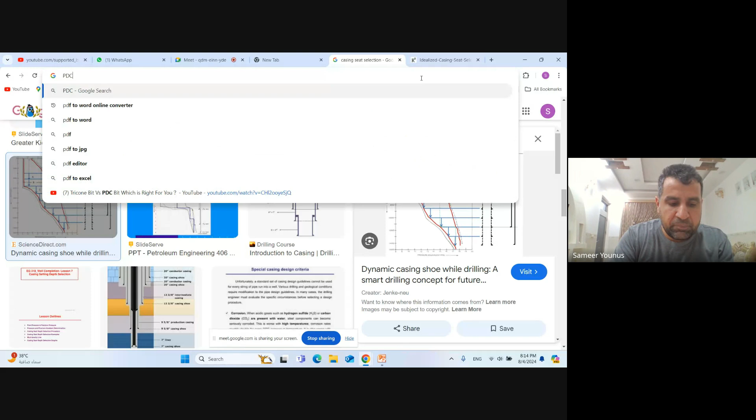Does lower ROP cause smaller cutting size? No. Cutting size, if somebody wants to know, has relation with the bit type and bit selection. I have 2 PDC bits - one PDC bit has a bigger cutter size. I would like to explain everything with a picture.

If this PDC has smaller cutters, like 13 millimeter cutter, it generates small cuttings. It's normally for hard formation. But if I put 19 millimeter cutters, it penetrates the rock deeper because the cutter is bigger, and the cutting sizes will be bigger. Bigger cuttings are more difficult for hole cleaning.

Yes Mr. Sameer, also there's 2, 3 questions. I think they want to use the mic, but someone asked about using oil-based mud instead of water-based mud to enhance hole cleaning.

Okay, yeah. So there are different types of mud systems, but mainly we talk about oil-based mud and water-based mud. Rheology-wise, water-based mud will have a really good rheology when you use it for hole cleaning.